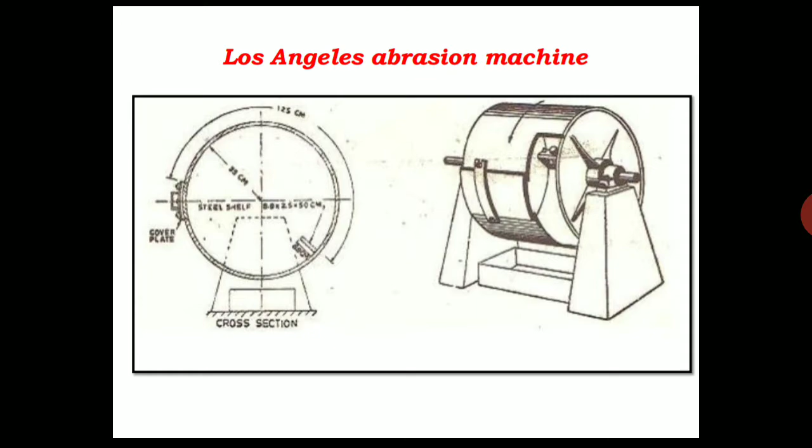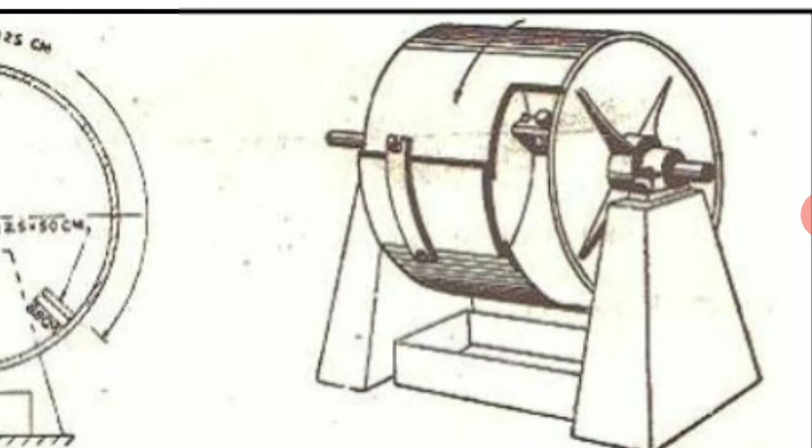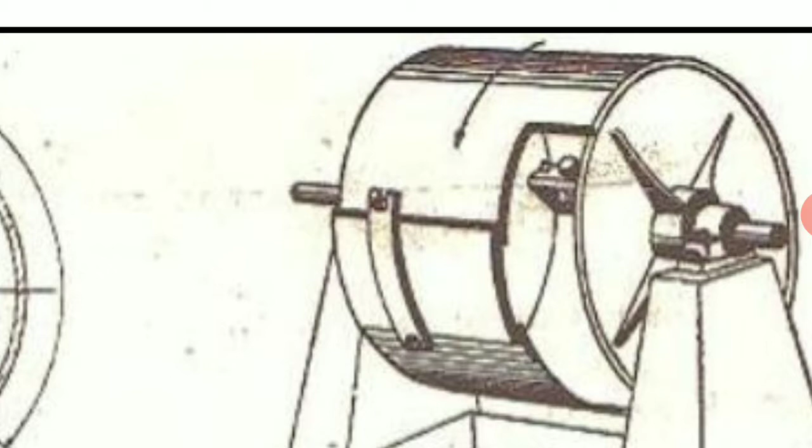This is a cross sectional part of the Los Angeles abrasion test machine, which will be having 35 centimeters in its radius. This is the rotating drum, what we can call it. This is the isometric view. So this consists of a base as well as the rotating drum, which has certain holes, or openings. Through that opening we can place the aggregates as well as the required number of iron balls.

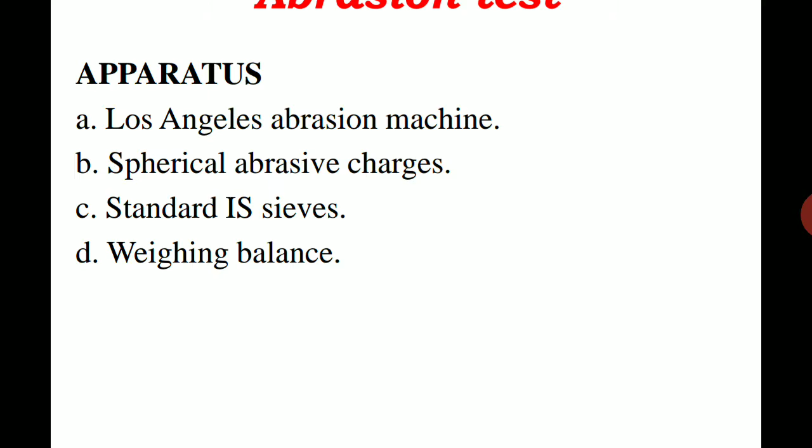Then the next apparatus is the spherical abrasive charge. As discussed, this spherical abrasive charge will be having diameter around 48 and 390 to 445 grams in weight. We require different types of standard sizes, which depend upon the grading table, the aggregate grading table.

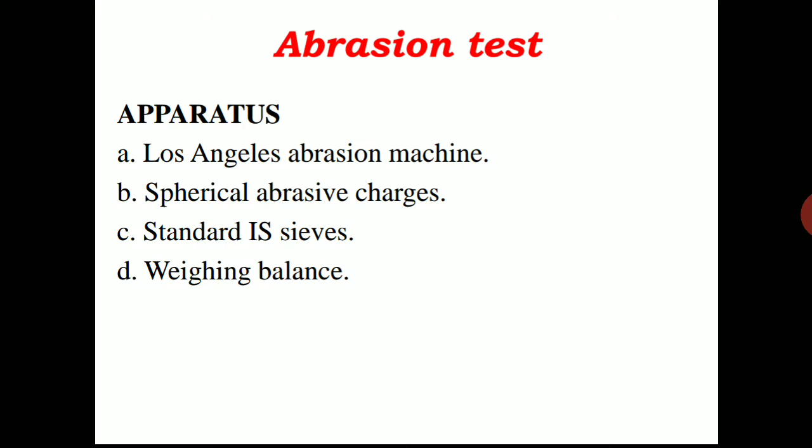We usually call it the grading of test samples. Then we require a weighing balance to measure the total quantity of the aggregate, the total weight of the aggregate. Coming to the next part, that is the procedure of this Los Angeles abrasion test.

The test samples we consider for this test should consist of clean aggregates which have been oven dried, oven dried at 105 to 110 degrees Celsius with a constant weight, what we call W1. This W1 value provides the total quantity of the aggregate.

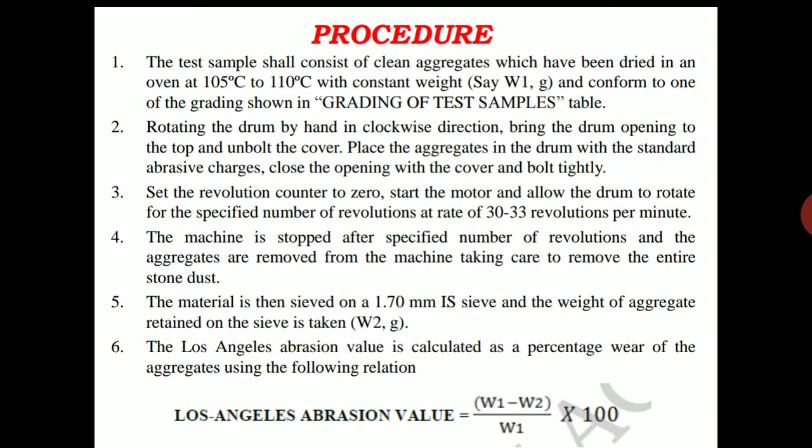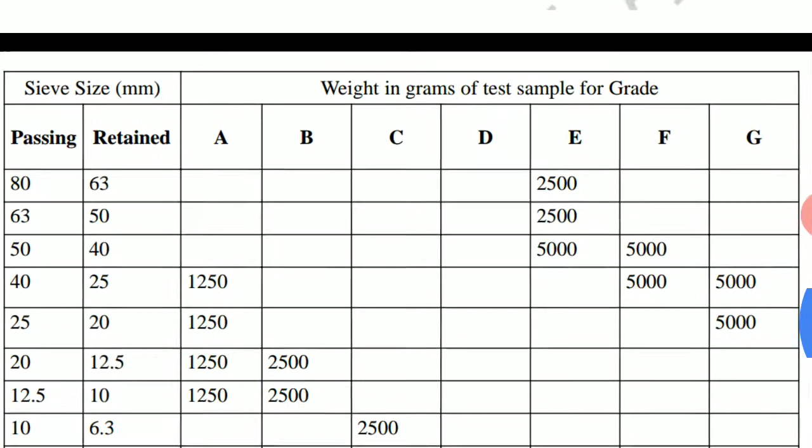This aggregate will conform to one of the gradings shown in a certain table. By using this table we will come to know the total quantity of the aggregate. Here you can see A, B, C, D, E, F, G. These are the different grades of the aggregate.

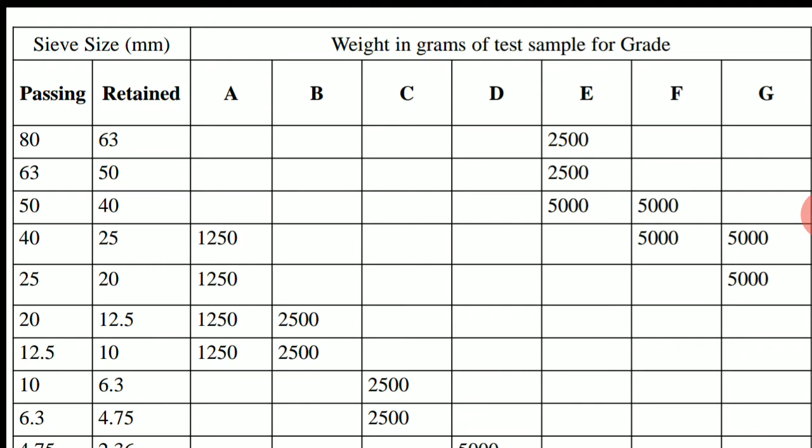There are around seven grades of aggregates, A through G, in this grading of test samples. Each will have different classifications, differentiated with respect to different properties. The first one is the sieve sizes, which classification depends upon.

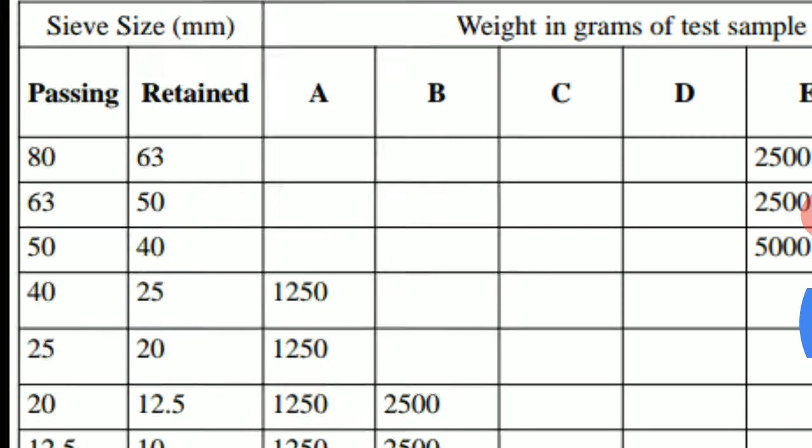And then the number of spheres which we will consider in the iron rotating drum, the weight of the abrasive charge, and then the number of revolutions.

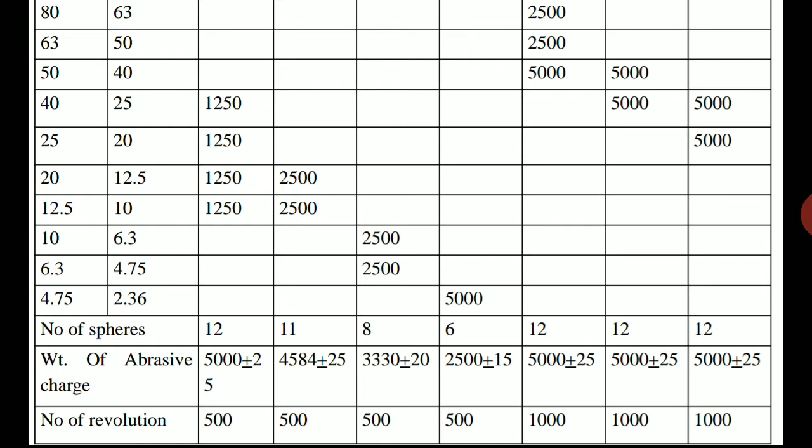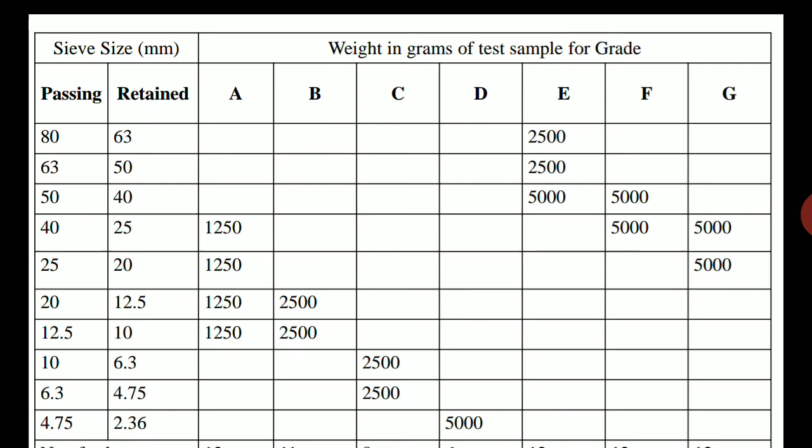So here you can take different examples. For example, if you take the A grade aggregate for the test sample, this A grade aggregate will be having certain properties. Okay, so this is A grade aggregate now.

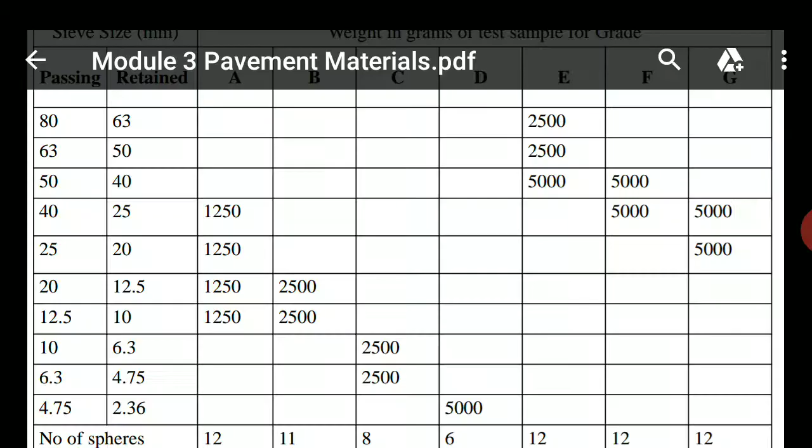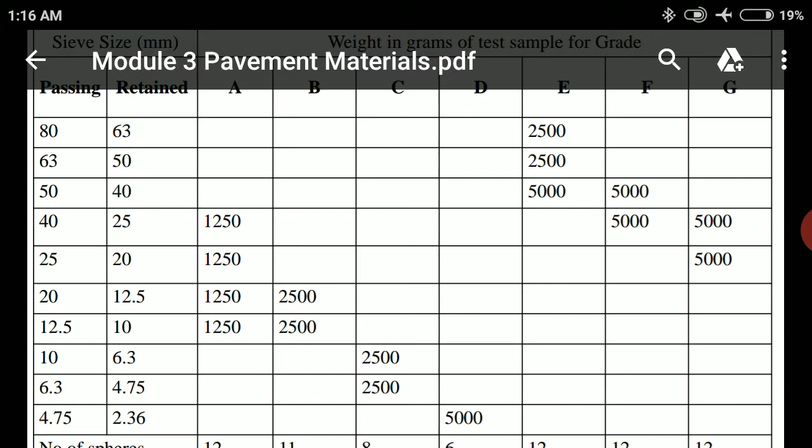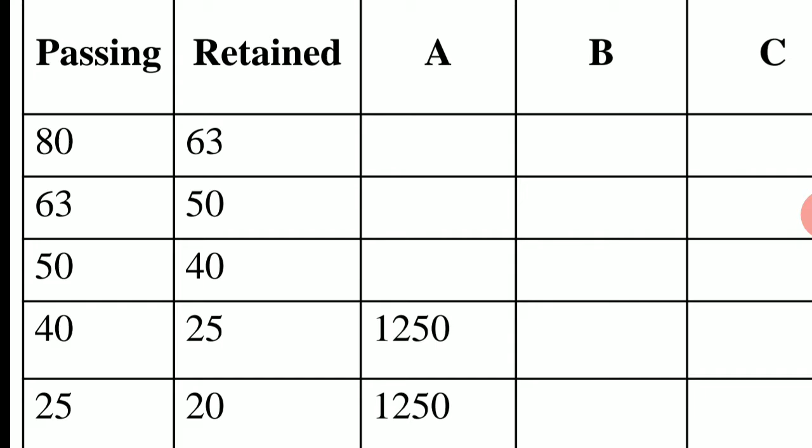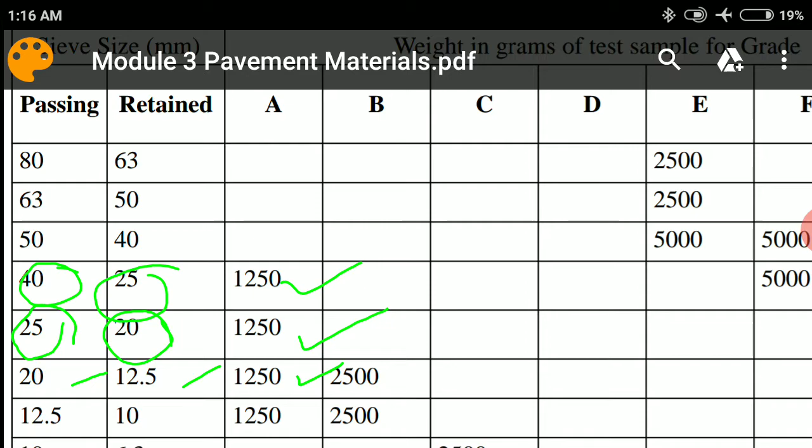Okay, so this is A grade aggregate. This A grade aggregate will have certain properties: aggregates passing 40 mm and retained on 25 mm, of quantity 1250 grams. Similarly, aggregates passing 25 mm and retained on 20 mm, 1250 grams. Then 20 mm passing, 12.5 mm retained, 1250 grams. And 12.5 mm passing, 10 mm retained, 1250 grams. So like this, total 5 kg of aggregate samples are considered in A grade of aggregate.

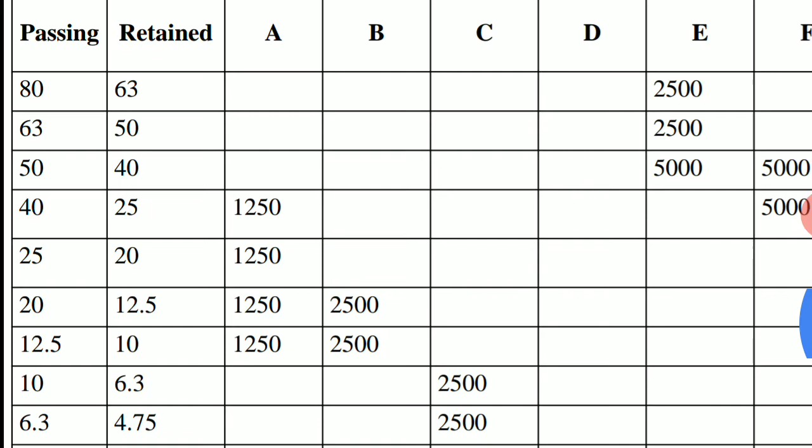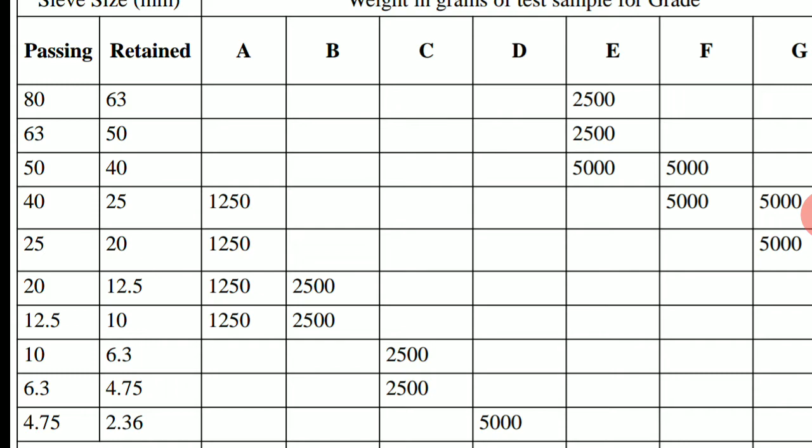Similarly, B grade is also given. Let me complete with the A grade first. In this A grade, the aggregates are differentiated with respect to different IS (Indian Standard) sieves. For this A grade aggregate, the number of spheres will be 12, and the weight of abrasive charge is approximately 5000 grams plus or minus 25 grams. So if we use 12 iron sphere balls, the approximate weight of the abrasive charge will be 5000 grams plus or minus 25, and the total number of revolutions will be around 500. Okay, similarly you can see for other grades also.

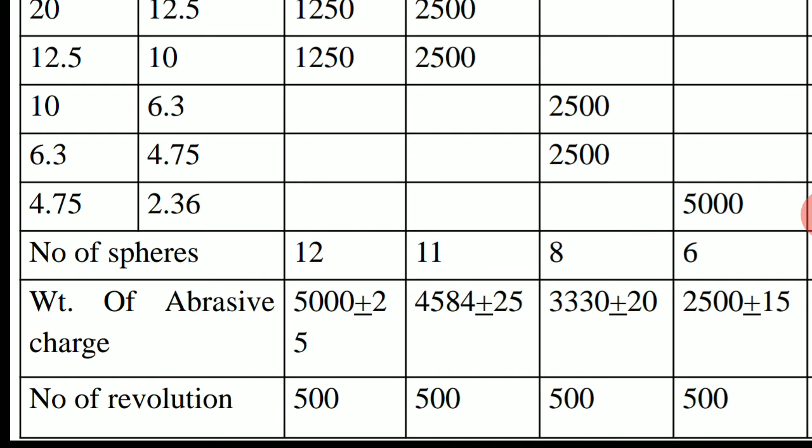For B grade also they have given: 20 mm passing, 12.5 mm retained, of quantity 2.5 kg, and then 12.5 mm passing, 10 mm retained, of 2.5 kg aggregate, total 5 kg. But the number of spheres will vary with different grades of aggregate. For B it is 11, for C it is 8, and as we discussed, for A it is 12. So this number of spheres will vary. You can see here for the first 4 grades, that is A, B, C, D, the total quantity of aggregate will be around 5 kg.

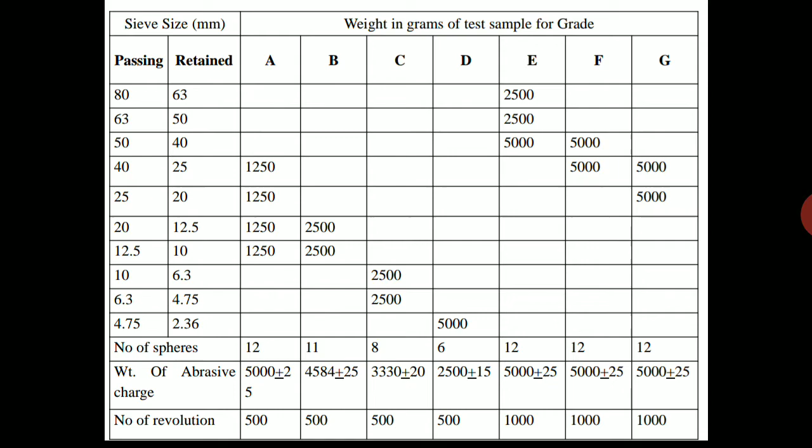And for the remaining 3 grades, that is E, F, G, the total quantity of aggregate is 10 kg. Similarly, the number of revolutions will also vary with respect to different grades of aggregate. So for A, B, C, D it is 500 revolutions, whereas for E, F, G it is 1000 revolutions.

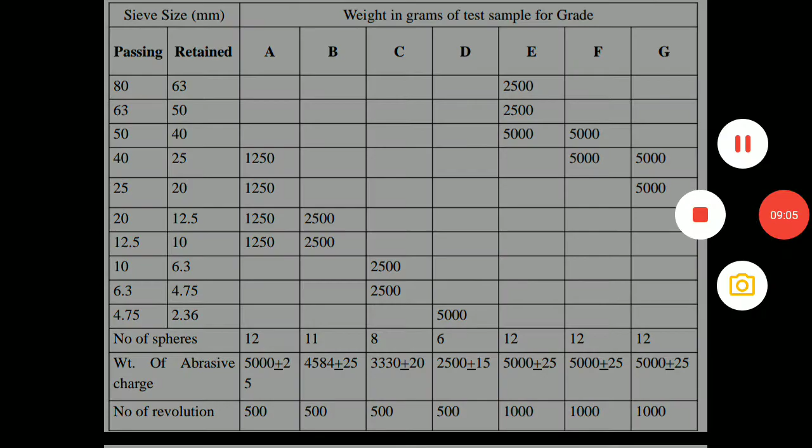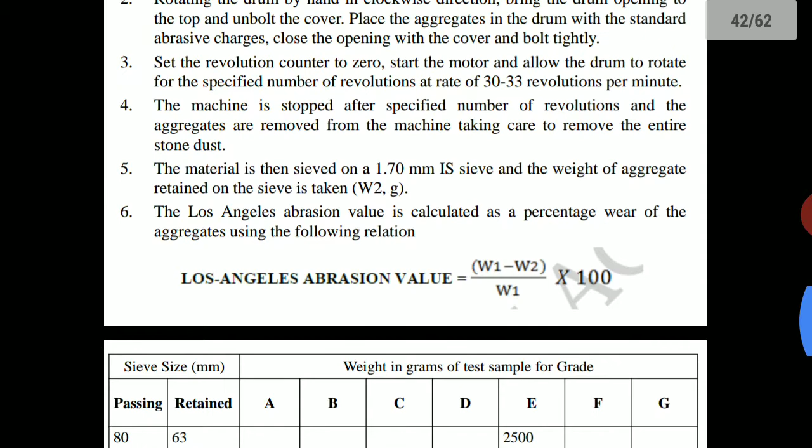Coming to the procedure part: based upon this grading table, we'll select any one grade, and then consider which aggregates we'll have to take. Now we'll take the aggregates as per the grading table, and that much quantity of aggregates we are going to place in the iron rotating drum, along with the required number of iron balls as per the table. We will rotate that with the help of the machines.

We will provide the required number of revolutions. If we have taken the A, B, C, D grade, then the total number of revolutions will be 500, at the rate of 30 to 33 revolutions per minute. After completing the 500 revolutions, we need to remove the crushed part of the aggregates as well as the iron balls or iron spheres from the rotating drum, and separate out the aggregates from the iron spheres. Now we need to consider the crushed part of the aggregates and sieve that one.

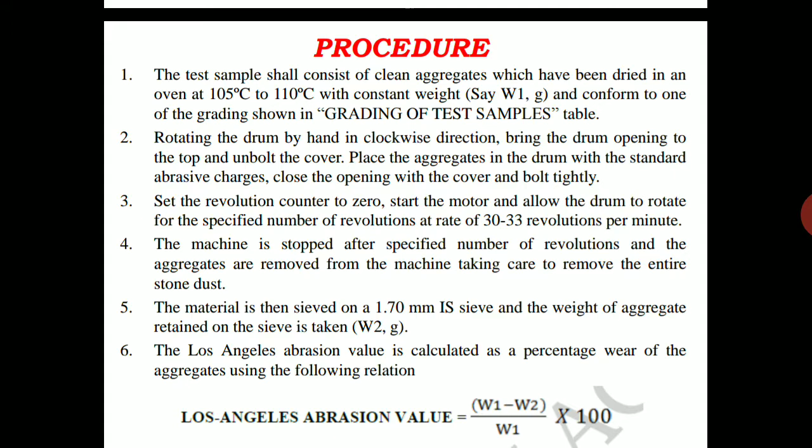So how it will get crushed - whatever iron spheres we have placed there, the iron spheres as well as the aggregates will collide with each other in that rotating drum. Due to the revolutions of the rotating drum, the particles in between will collide with each other. Because of that collision, some aggregates may get hit with the iron spheres and get crushed off. So we need to find out how much percentage of the aggregates are crushed off.

The total weight whatever we have considered from the table, we note down as W1. Now the aggregates we get separated from the rotating drum, along with the spheres - those aggregates we need to sieve using a 1.7 mm IS sieve.

Here some of the aggregates will pass and some will get retained. Usually the passing materials we call the crushed particles, and the retained particles give the exact amount of aggregates which are retained.

The aggregates retained on the 1.7 mm IS sieve, we consider for the calculation, because as per theory we should consider the passing materials itself. Since we can't collect 100% of the passing materials from this test, we take the retained particles and then calculate the passing particles.

Why can't we collect 100% of the passing particles? Because some particles may come out in the form of dust, and some particles may get attached to the surface of the iron rotating drum - we can't collect those particles attached to the drum. So to avoid that, we take the retained particles and then calculate the passing materials weight.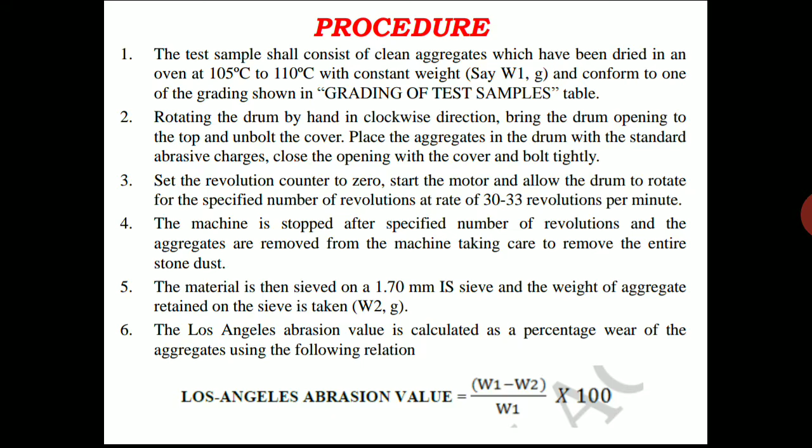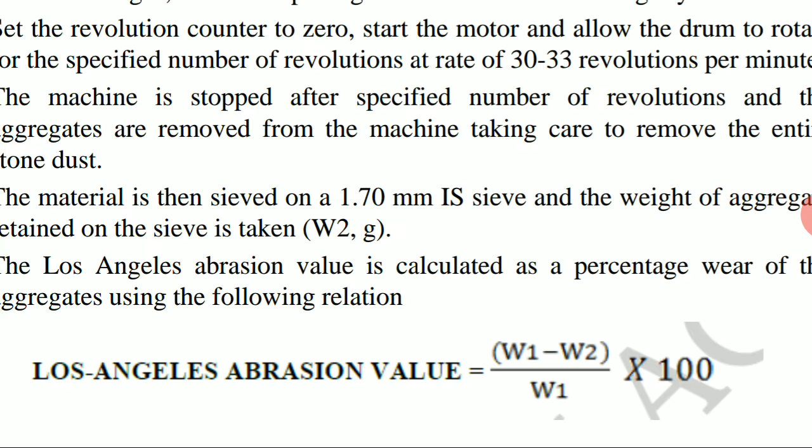The final Los Angeles Abrasion value is found using this formula: W1 minus W2, divided by W1, into 100. Here W1 is the aggregate weight we considered from the table, and W2 is the aggregates retained on the 1.7 mm IS sieve. By using this we find the Los Angeles Abrasion value in terms of percentage.

The maximum allowable Los Angeles Abrasion value of aggregates for different types of pavement layers is as mentioned below. Certain recommendations are given for this value across various pavement types. For water bound macadam sub-base, water bound macadam WMM, and CRM base courses, the Los Angeles Abrasion value maximum should be around 40%.

For these different pavement layers, if the pavement layer is dense graded bituminous macadam binder course or cement concrete pavement, the Los Angeles Abrasion maximum value should be less than 35%.

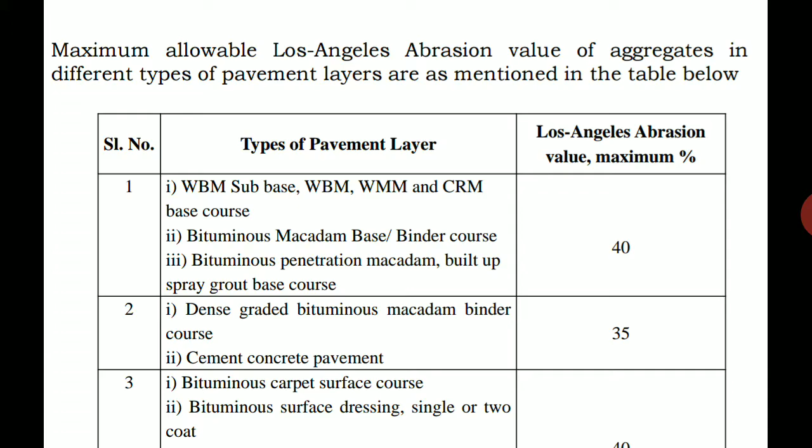Similarly, for bituminous carpet surface course, or bituminous surface dressing single or double coating, or close graded bituminous surfacing, or mixed seal surfacing - for these pavement layers the Los Angeles Abrasion value should be less than 40%, and for bituminous concrete surfaces it should be less than 30%.

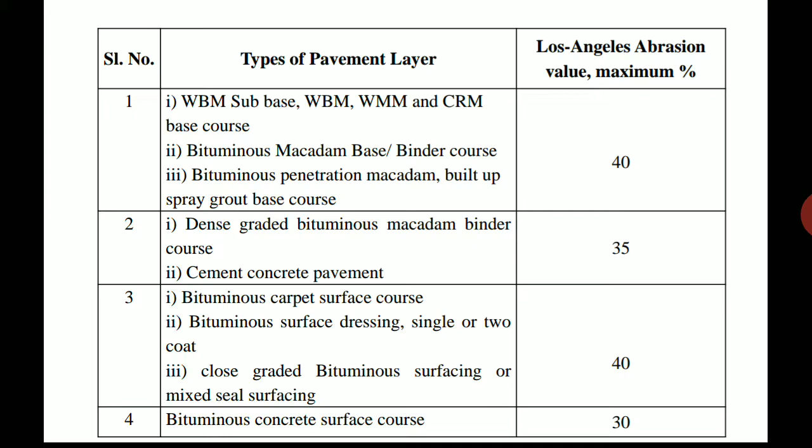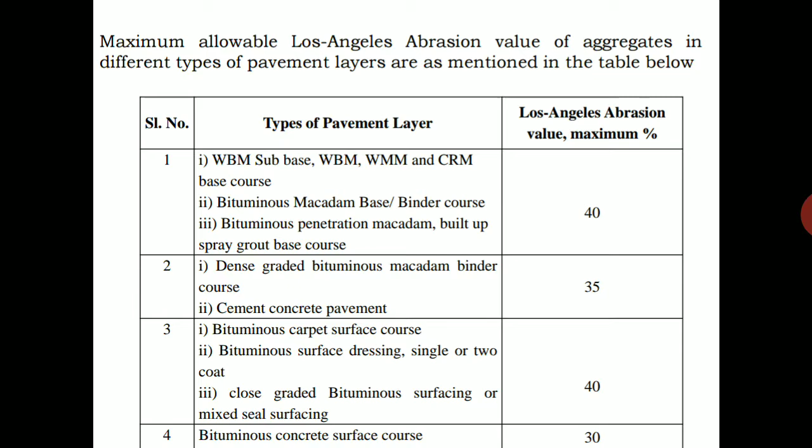So they have given recommendations for this Los Angeles Abrasion test. By conducting this Los Angeles Abrasion test, we find out the percentage of wear in the aggregate. Thank you.